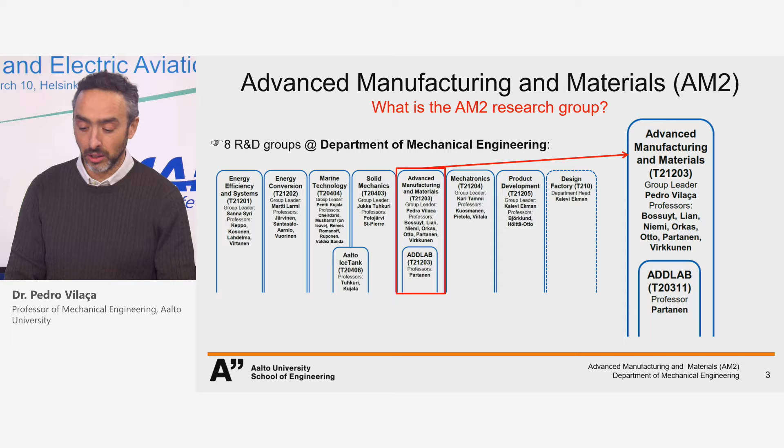So I am the head of the Advanced Manufacturing and Materials Research Group, which is one of the 8 research groups at the Department of Mechanical Engineering of the School of Engineering of Aalto University. We are 8 professors and about 50 staff members.

Some highlights I would like to take the opportunity to introduce: in advanced manufacturing related with additive manufacturing, our ADDLAB is a key international partner in this field. We have the most important casting research facility in Finland. We are leaders in friction-based technologies, and the hybrid channeling, which is the innovation that I bring today to present to you in terms of thermal management for aeronautic components, is one of those innovations coming from this line of research. Quality control and production management in circular economy are also on this scope.

In advanced engineering materials, we are involved in the influence of hydrogen in materials and hydrogen economy, namely in the manufacturing and application of advanced manufacturing solutions in the production of PEM-based fuel cells. We also have distinctive research in multi-scale modeling of steels and in materials characterization, including microscopy, digital image correlation, and non-destructive testing technology.

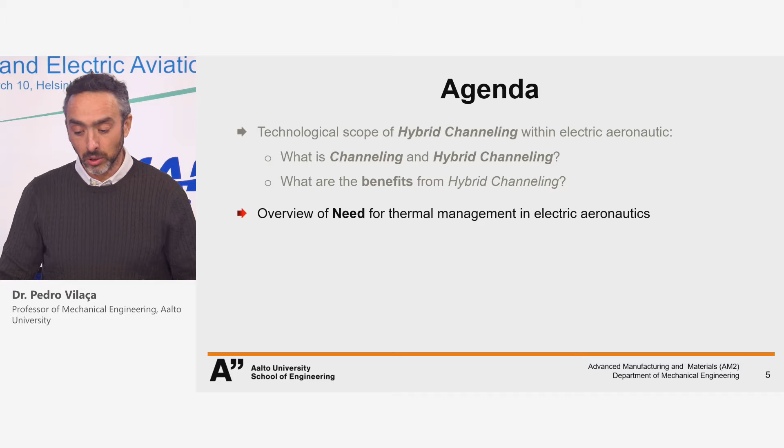So for today's agenda, we will start by evaluating and addressing the hybrid channeling. So what is channeling, what is hybrid channeling, and what are the benefits from this innovative manufacturing technology invented at Aalto University. The need for thermal management in electric aeronautics will be overviewed, and we will close the presentation with 2 application examples, one for electrical motors and another one for battery cells. We will then close with the wrap up on conclusions and summary.

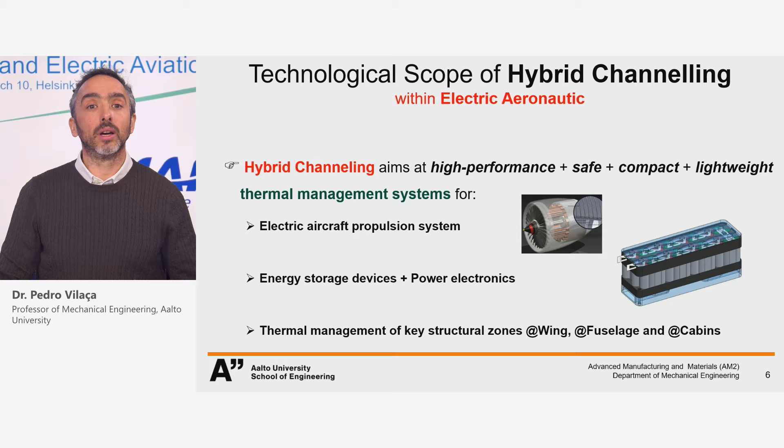Hybrid channeling aims at thermal management systems, producing or delivering solutions that are safe, compact, and lightweight, as demanded by the high power density propulsion systems, high energy density storage and power electronics, and many structural components.

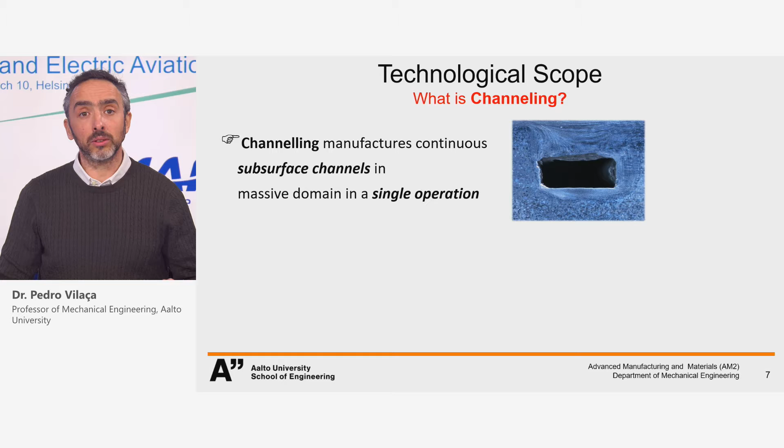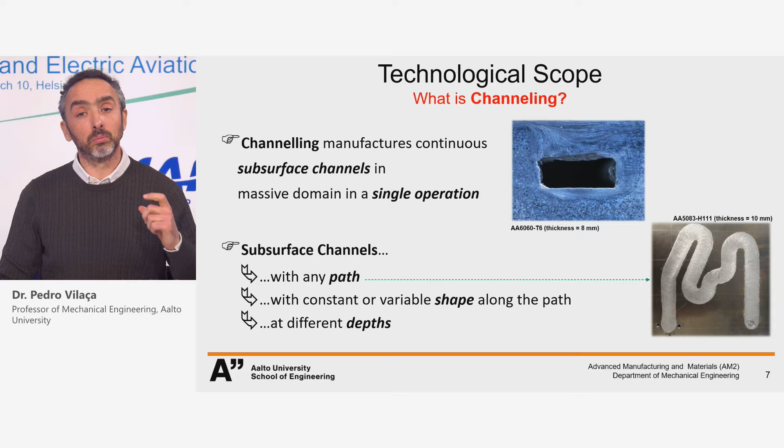So what is channeling? Channeling is a manufacturing method that enables to produce subsurface channels in massive domains in a single operation. These closed subsurface channels can have any path, and variable or constant shape, being produced at different depths.

The innovation of hybrid channeling is a big jump in terms of the opening of opportunities for design and structural design, and design for thermal management also in particular.

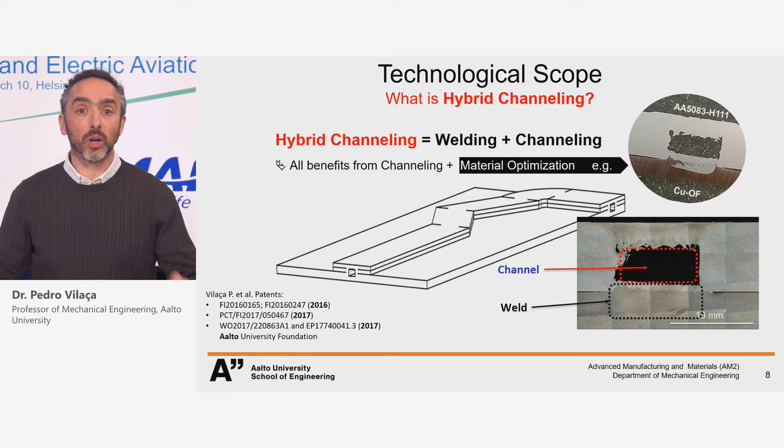So hybrid channeling is an innovation and an invention from Aalto University, where besides all the benefits from channeling, we produce a weld, and so we are able to combine different materials or different thicknesses, and so we now have a higher level of freedom for tailored optimal design for structural and thermal applications.

So we produce these by using a non-consumable tool that has features that extract material from inside and a tip that produces the weld. All this is done in one combined action, in a domain of viscoplastic third body, which lays between the liquid and the solid.

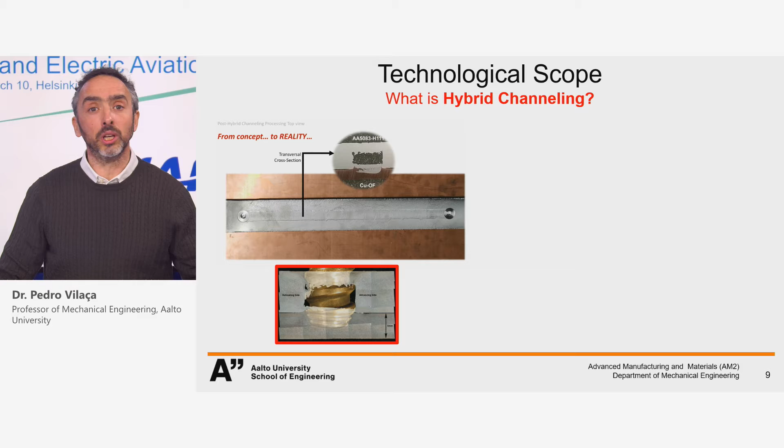Because schematic representation and films address this better, you can see a representation here where the tool produces the internal subsurface channel while producing the weld between two different materials, an aluminum alloy and a copper thin plate.

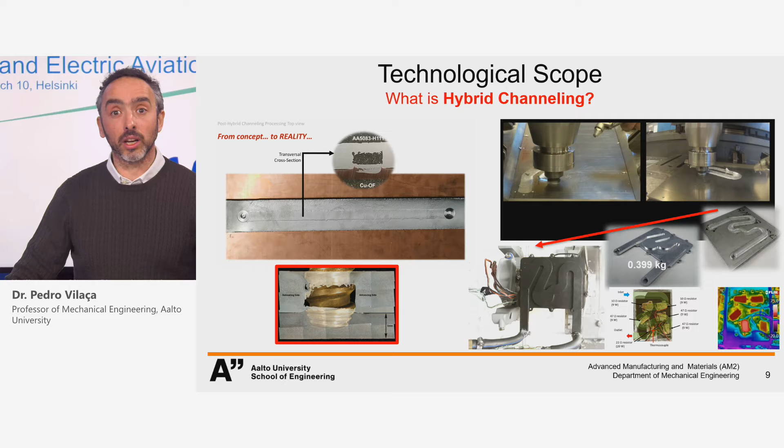One of the prototypes that has been produced is now running inside electrical vehicles in partnership with a recent Finnish startup that produces modifications from combustion to electrical engines in classic cars.

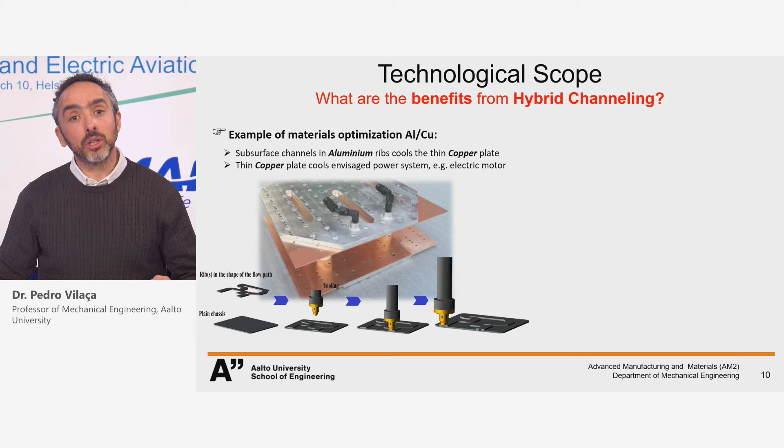You can see a thin copper sheet that handles the thermal management, and then thick aluminum manages the copper sheet. The copper is heavy and expensive but has high temperature stability, corrosion resistance, and thermal conductivity. We reduce cost and weight using lower-cost, lightweight aluminum to do the thermal management.

This thermal management in particular takes advantage of quasi-null contact thermal resistance between the components. This is a major advantage compared to most solutions, where you have different materials and a coil of copper or aluminum contacting other bodies.

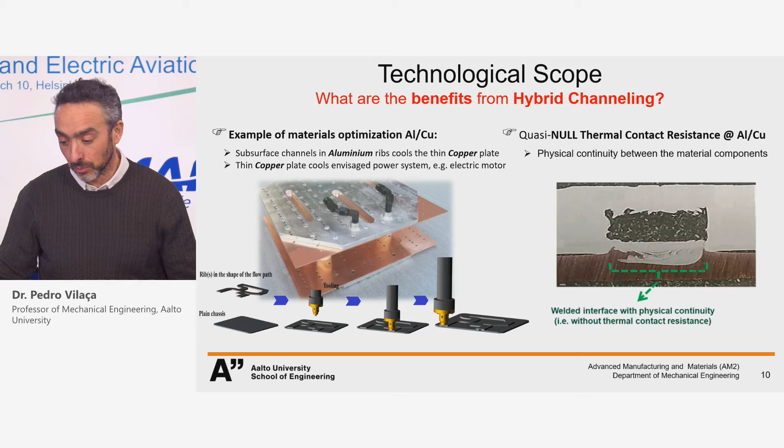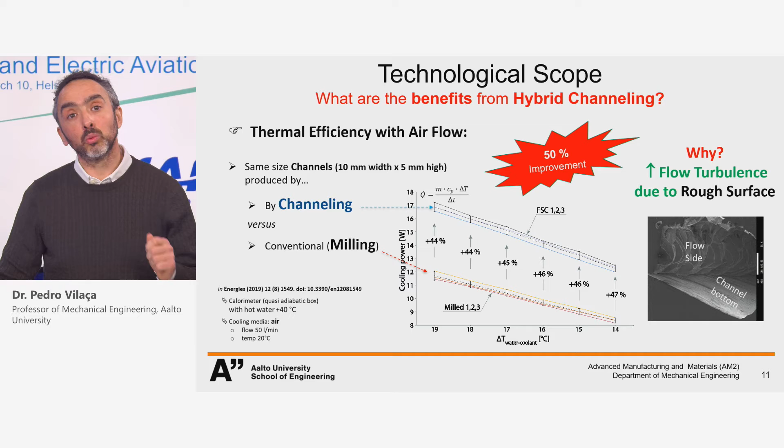Other important advantages of hybrid channeling come from the roughness of the surface, with improvements of up to 50% found when we apply air as the cooling media. This means we can use air in domains where only liquid was possible before.

This is due to the irregular and multidirectional rough fractal condition of the surfaces, which also delivers high surface per volume and promotes an early onset of turbulent flow even at relatively low flow rates.

You can see some of these features in this optical 3D scan of the bottom, ceiling, and side surfaces of the internal subsurface channel in this slide.

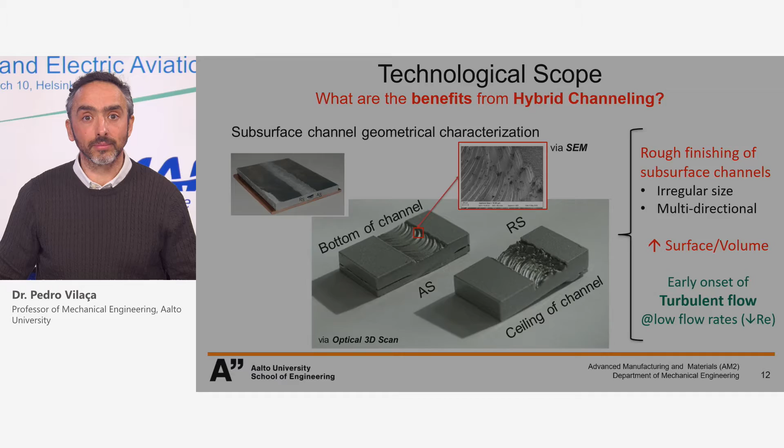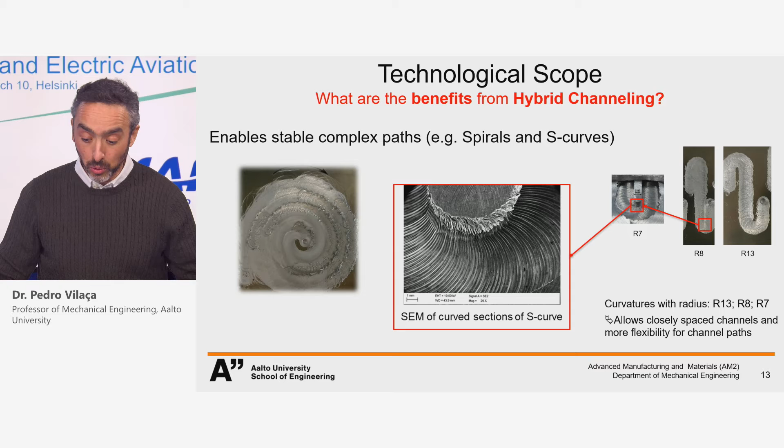We have proved that it's possible to apply the process in complex spirals, sharp curves, and really complex, tight, low-radius curvatures. So the design and conditions are able to address complex design demands.

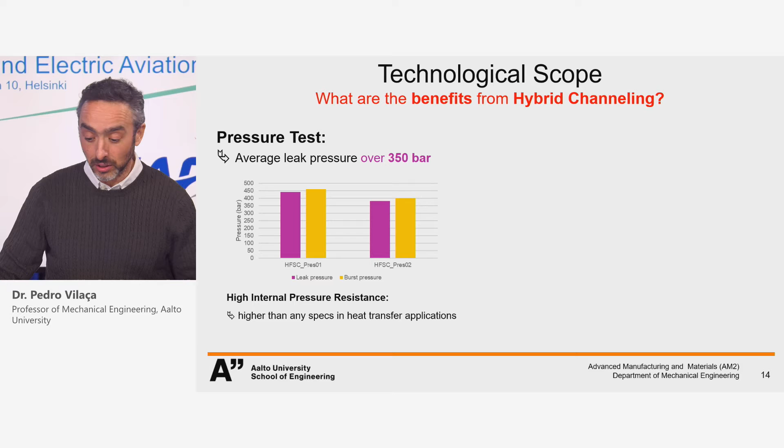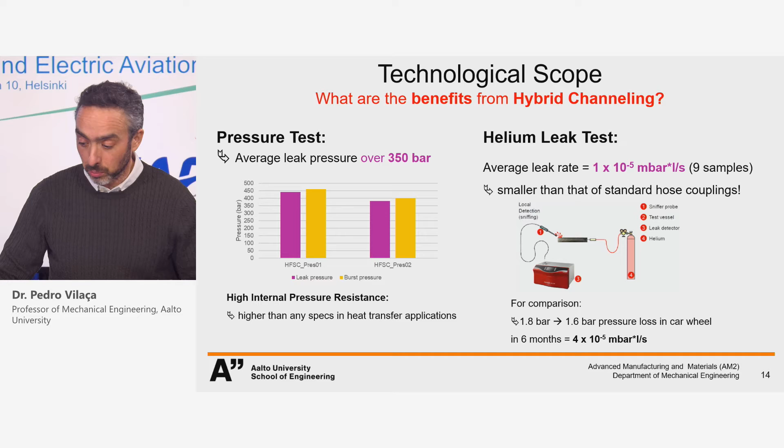Other important features: the internal pressure for burst and leaking has been found to be over 350 bars, most of the time over 400 bars. This is higher than any specification in heat transfer applications that I know of. This, along with very low helium leak test results—where most problems always come from couplings—compares favorably to the leak-free condition of these channels.

So there is a perceived need for thermal management in electrical aeronautics. This is important if you consider, as an example, a 60 kilowatt rotor power propulsion system. At 95% efficiency, you have energy dissipation, mostly as heat, of about 3 kilowatts.

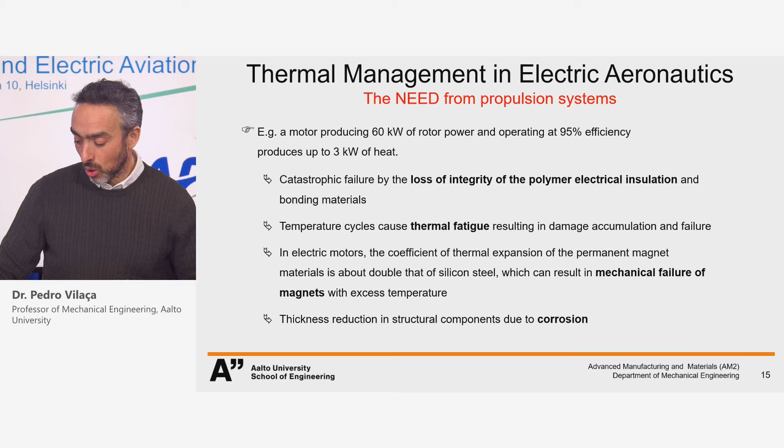Without proper, safe, and reliable thermal management, this will lead to loss of integrity of polymer insulation, thermal fatigue, problems induced by different expansion factors of the different engineering materials these components are made of, and corrosion induced by the higher energy levels in operation and complex chemical environments.

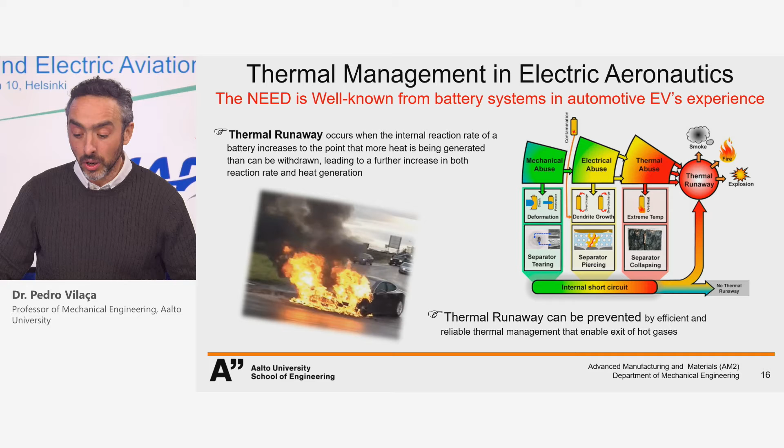This is well known, nothing new here. We know this from a much more mature application in automotive. Thermal runaway and loss of control by mechanical, electrical, or thermal abuse inducing short circuits are well known. The problem is that it cannot happen in flight. When it happens...

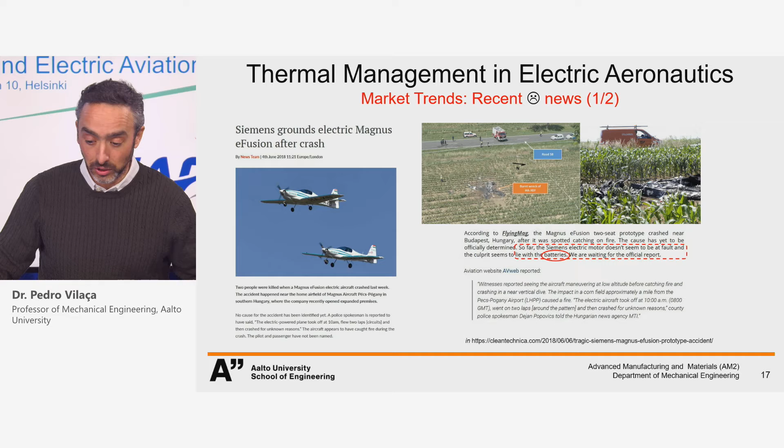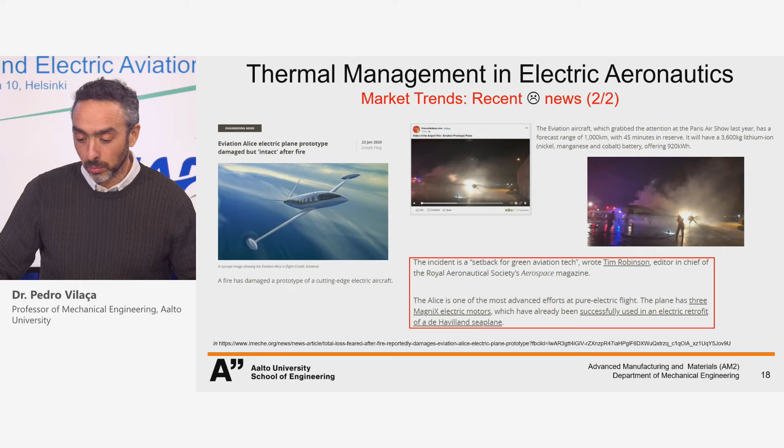Unfortunately, but not unexpectedly, development has some drawbacks in all technologically relevant evolutions. We also know of some recent crashes related to batteries in this situation—apparently the electric Magnus eFusion in 2018, or more recently some components from the energy storage of an Eviation electrical plane also caught fire.

So it is obvious that the safe operation of electrical aviation depends on proper thermal management for high power propulsion systems, high energy density storage devices, power electronics, and structural components that demand de-icing, as an example.

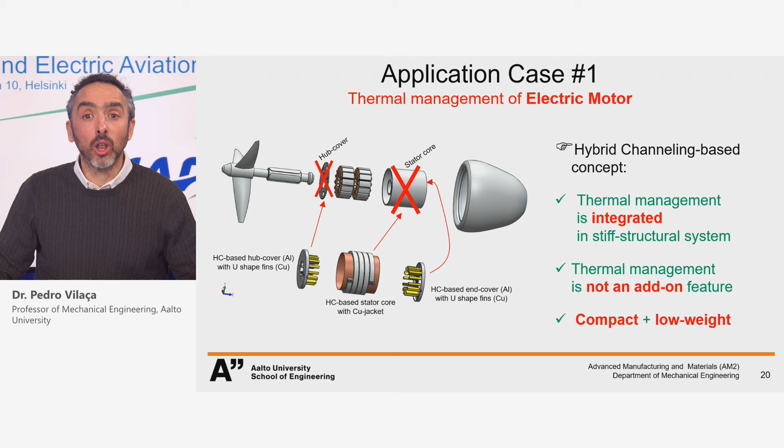I will now introduce two exercises that are ongoing in terms of prototyping towards piloting. The first is an application to an electrical motor, where we provide a solution integrated into a stiff structural system. So the thermal management is not an add-on feature—this enables a compact and low-weight solution.

In this slide you may see the components. We have a stator cover made of a thin copper jacket cooled by helicoidal ribs in aluminum with two channels, and then we have the hub cover and the end plate. But let's see this in more detail.

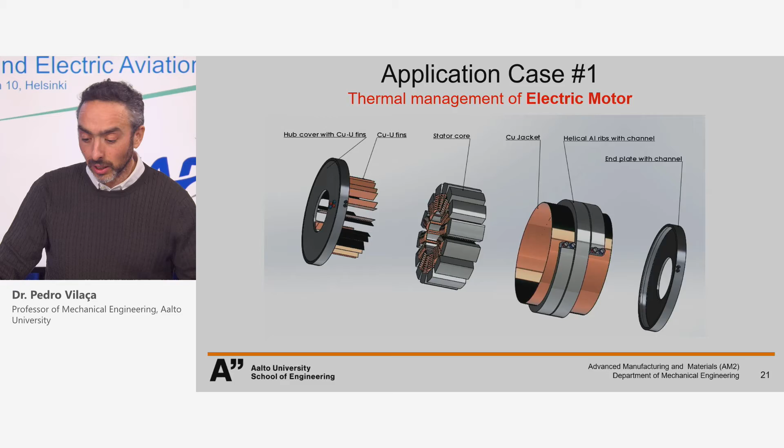You can see in this detail the two hybrid channels, where the aluminum rib is welded to the copper jacket. The copper jacket forms the internal environment, and the cooling liquid circulates within the rib, which has non-relevant thermal resistance in contact with the copper. So all the liquid runs outside of the system, meaning any leakage would not be catastrophic in contact with the electrical circuit inside the electromagnetic electric motor.

For the hub cover, we plan to provide thin copper fins welded to the body, with a cover containing three channels providing thermal management for these fins. They go inside with no contact with liquid, providing local, all-around surface thermal management.

We have the same for the end plate, and then we can close the system again using thermal management with hybrid channeling. So one same process is able to produce the components that the engine is made of, providing at the same time the thermal management.

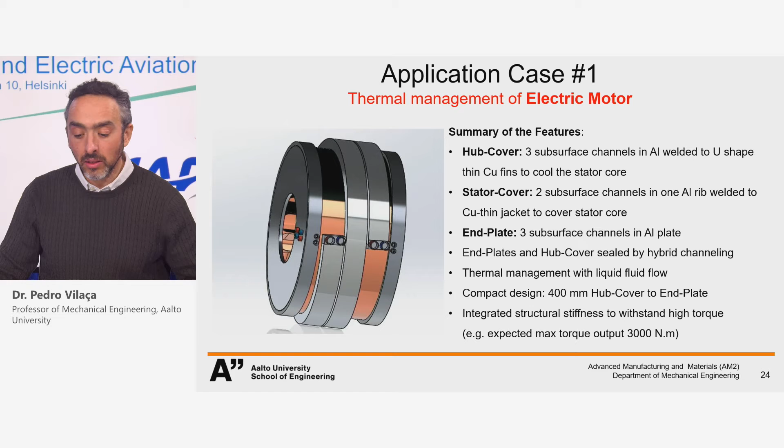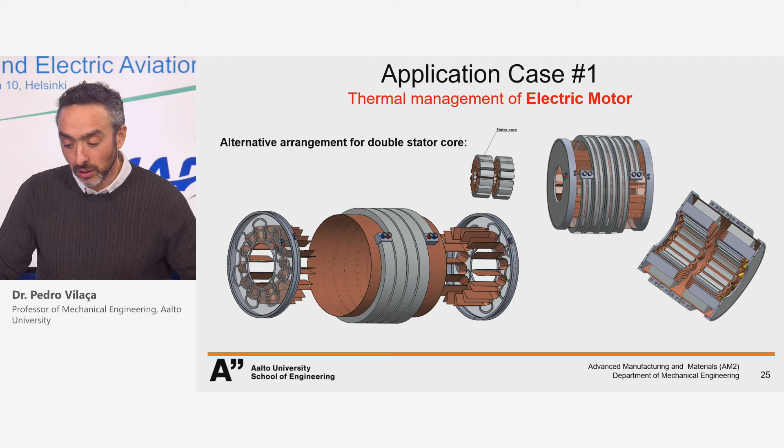More details in terms of perspective on the hub cover with the copper fins and on the stator cover and the final system. So, in summary, we have these 8 subsurface channels, 3 in the hub cover, 2 in the stator cover, and 3 in the end plate. All of them are compact in design, and they are safe in operation as they separate the liquid from the electromagnetic domain. Other designs can be expanded from these for more complex and higher power engines, namely with double stator core.

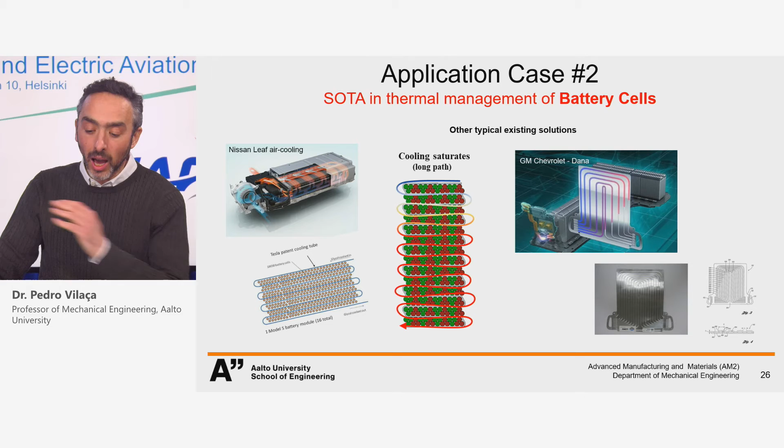For the battery cells, we have several solutions. It's quite a mature field of technology, the storage of energy, and solutions exist, but none of them provides the reliability at the level and the operation capacity at the level that aeronautics demands with a lightweight solution. And for that, we now have prepared, and this is a new patent from Aalto University, a direct assessment of each one of the cells, cylindrical cells, prismatic cells, pouch cells.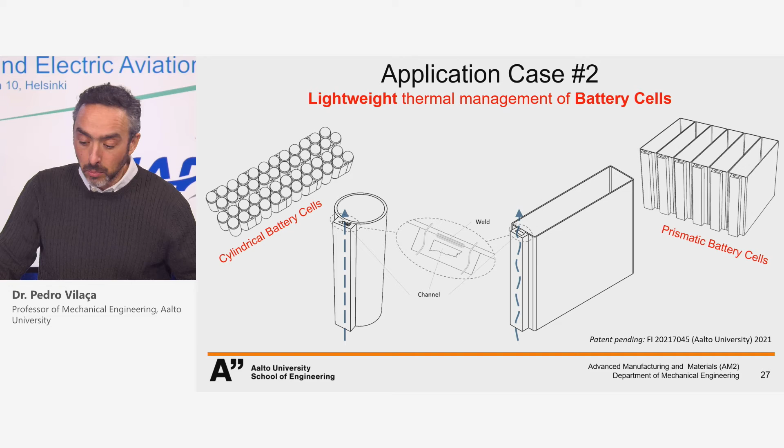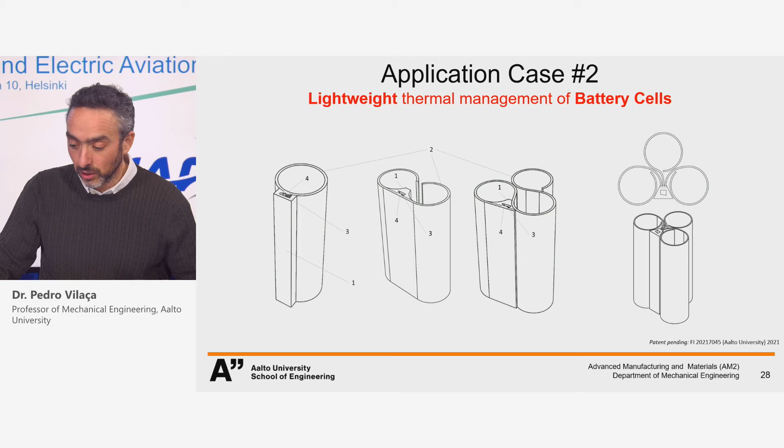We can have straight or waved channels that are ribs that are welded to the aluminium fin that involves all the battery, and we can encompass 1, 2, 3 more units with one fin or more fins coming from the same rib. The concept accesses all the surface with emphasis also for the anode and the cathode zones,

and it takes air in an aluminium structure, so extremely light, in a very short path, so there is no saturation of the airflow, and it takes advantage of the self-convection plus the force that can be controlled by several electrothermal components like Peltier components. So these are some more details where the implementation in a battery cell model is here represented with the 3 parallel times 16 series of 48 cells.

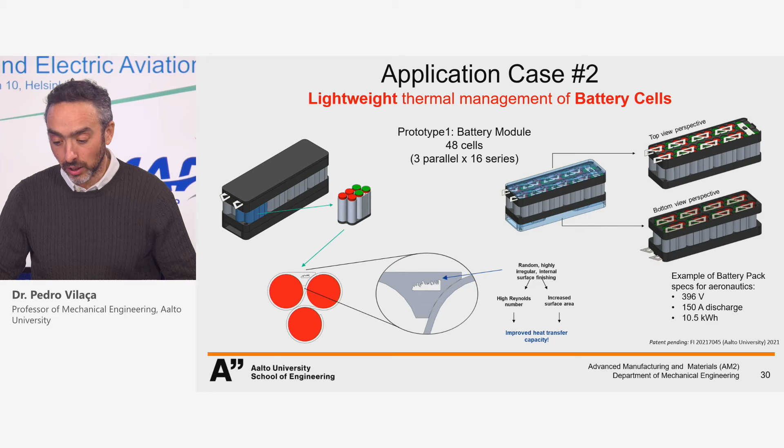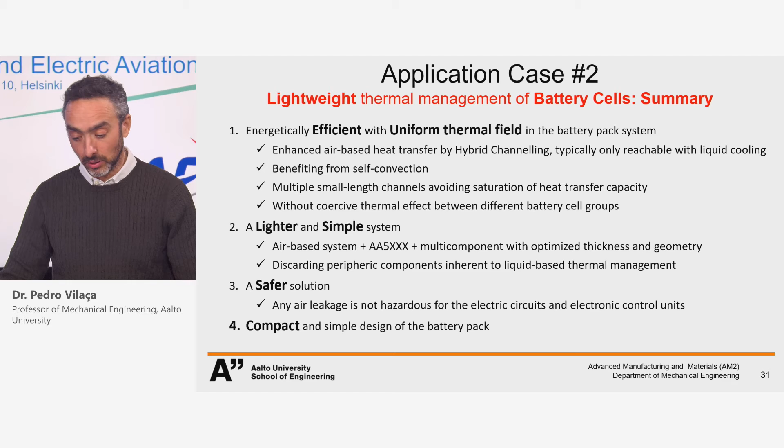It's safer, so any air leakage is not a hazard for the electrical circuits and the electronic control units, and it is compact, as space is also important in aeronautics, besides the weight. So, in conclusion, I summarized some of the benefits. There are challenges, naturally, related with any innovation in manufacturing, but we can provide an optimized multi-material solution in a self-stiffened structure. Thermal management is fully integrated in the structure, and it's not an add-on feature. So we also have this benefit in terms of complexity reduction and weight.

And this lightweight is already addressed by the optimization of the thickness and the materials. It's efficient, as we have evaluated in experimental implementations and modeling. Cost efficient, we hope it will be, because we have the minimization of the material, and we are able to perform with one action a complex operation of opening channels, closing channels, and producing the welds between different elements. Reliable, robust, and sustainable, as it is the name of this conference, with the ecological approach.

The process is a solid state process where no fumes, shielding gases, or radiation are emitted, and the efficiency of the process is also quite high.